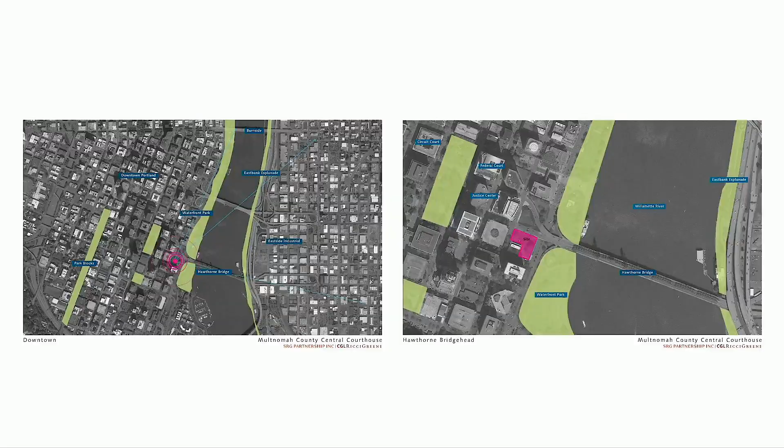Site selection was one of the very first pieces of the project. We wanted to find a site that improved access to the building, that was in the downtown corridor, convenient to public transportation hubs, and a prominent location that people could find. That was one of the really critical pieces.

There were a lot of considerations in terms of access for law enforcement and access to the jails. Some stakeholders wanted a courthouse located more conveniently to other jails in the county, further east. Keeping it in the corridor helped the people most in need of the courthouse have really direct access.

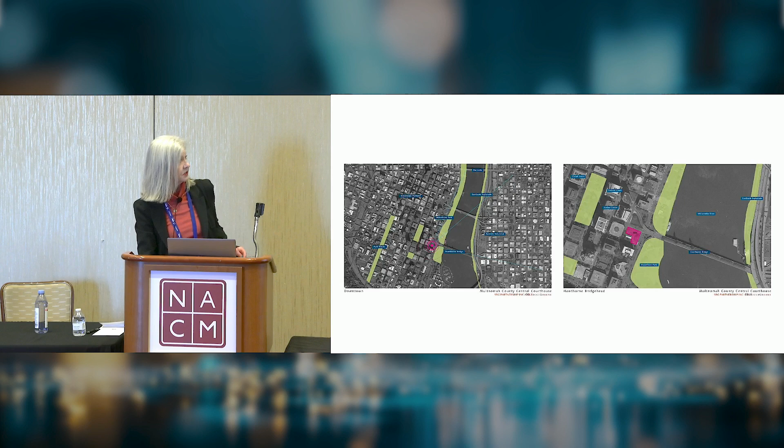This is the location. You can see the red area showing where we were located. The courthouse is located directly on the Willamette River.

These are just some beauty shots showing the views as you're looking east from our courthouse. We are fortunate to have a view of Mount Hood from that aspect.

This shows the footprint of our courthouse. The entrance is at the northwest corner, so the court faces east to the river. That's the river side, and the westerly facing side is where you enter the courthouse.

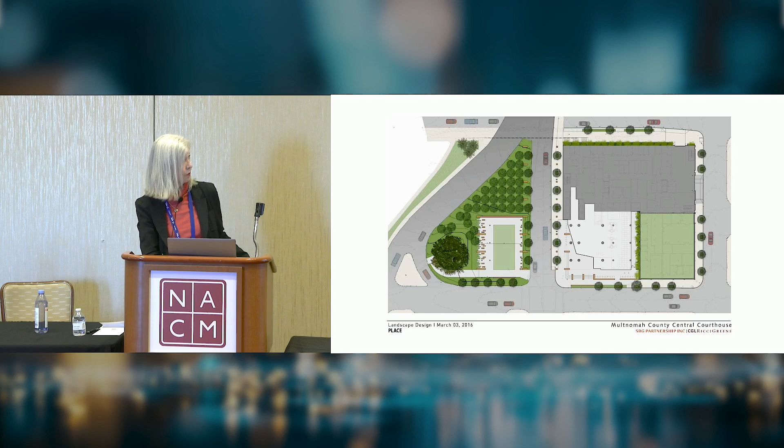The court entry is a 3-story glass corner, so all sides are glass, and it really does physically embody transparency. As you're entering the courthouse, you know what you're going into. Compare that to those solid wooden doors in a big marble building we had before - here, as you're crossing the street and entering the steps, you can get a glimpse of what's going on inside, where you're going to be going once you get in there.

An aspect that was really important to the city of Portland was pedestrian improvement.

This is the first floor of the courthouse and the sidewalks surrounding it. The city's initial goal, in order to improve the pedestrian experience, was to offer retail on the first floor and have windows looking into the courthouse from the sidewalks.

That was a real concern for those of us working on the design, because the first floor needed to accommodate detention space for people coming in custody. Obviously, windows looking into detention holding areas is not an ideal thing.

And when you think about retail on the first floor of a courthouse with all the courtrooms above it, with no security in a retail area, somebody could leave a backpack or anything explosive, really putting the entire courthouse at risk. So we wanted the entire courthouse perimeter secure.

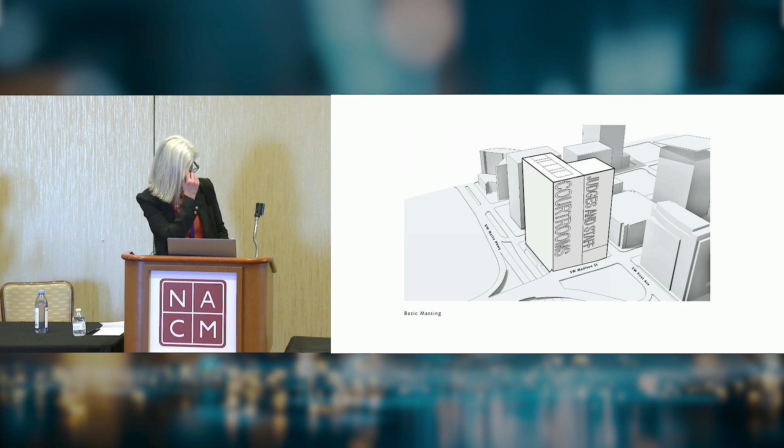Actually, this is probably a good time to turn it over to you for a bit to talk about the makeup of the building. Oops, now I'm going to go back one. I think this is all my fault, by the way, as usual - that's what I'm here for. No, the slideshow was originally set up to automatically advance. I thought I had turned that feature off. Clearly I did not, and poor Barb had to suffer the consequences.

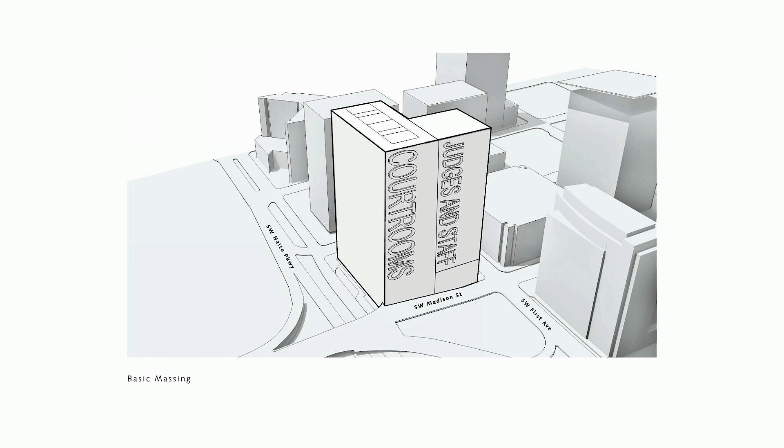I was so inspired by Judge Pratt's presentation this morning. She took what we thought we were going to talk about and made it spectacular - expanded and personalized it in tremendous ways. But I was struck that everything she was doing, all that wonderful work, was taking place in that old courthouse. It was all make-do, work-around, and the effectiveness and positive outcomes of those interactions were very much related to human interaction - the way you speak to someone, the way you show them that you care and show respect, et cetera.

So what we were doing here is kind of the flip side of that. We were taking all those principles, as espoused by Judge Waller and by Barb, and asking: how do you make a building out of that? How do you make a building that expresses procedural justice? That's a little bit what I'm going to talk about today.

You can see, for instance, this is the building on its site. It fills up the entire site.

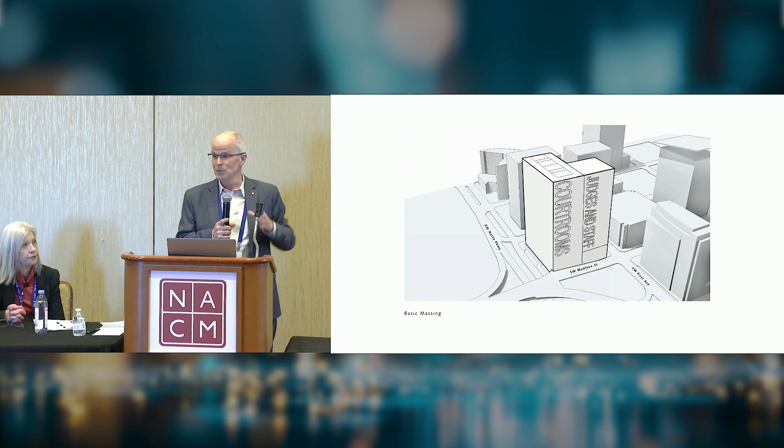Portland, Oregon is 200 by 200 foot square blocks for the whole downtown, which for a courthouse with 45 courtrooms is tiny, so it's jammed in there. It's 17 stories high, with absolutely no setback from the property line. There's no courthouse square, no public space in front of the courthouse, which is so fundamental, you just expect it.

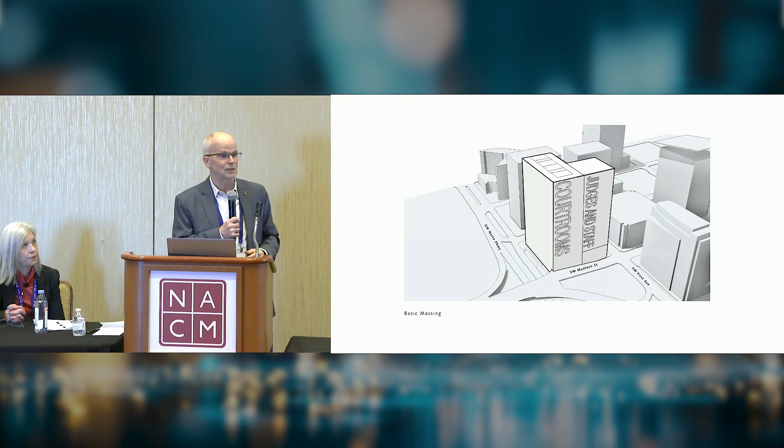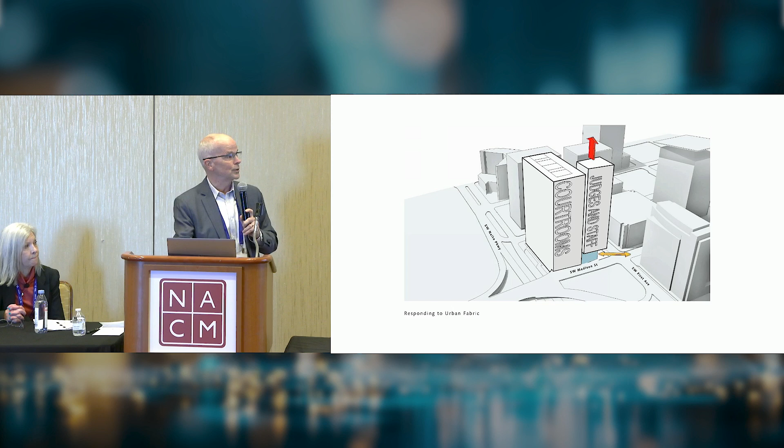So we actually put the public space, the courthouse square, underneath the courthouse. We organized the building into two big blocks, courtrooms and judges and staff, and lifted the building up so the public could have a large public space, with transparency and civic grandeur inside the building rather than in front of it like the old building had. We lifted up the block of judges and staff, and oriented the courtrooms and public spaces to the view. Mount Hood is really spectacular.

Snow-capped most of the summer, but certainly right now. Then we created a public experience coming through the lobby that brings you to that view, to the Willamette River in the foreground, the city, the park in front, and then the view. So the idea that you have a courthouse that... I'm sorry, I saw a hand go up.

Well, believe it or not, every now and then you get a clear day in Portland.

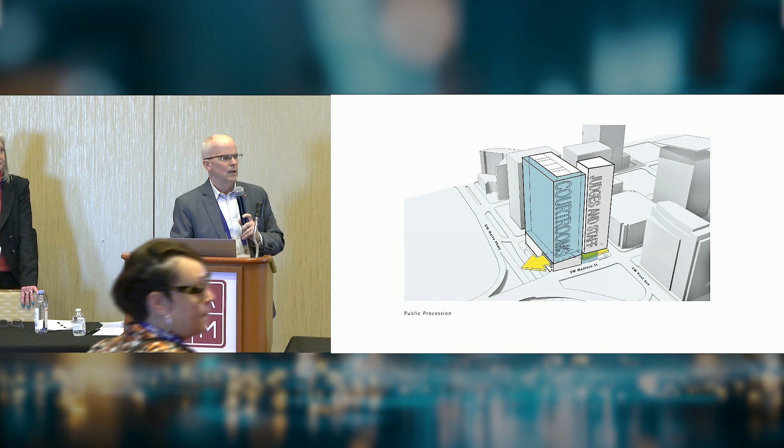Well, the windows in the front, you mean the public entrance? You'll see in a minute how we manage the security screening, but they're not bullet resistant. They're very, very large windows that are laminated glass. They're abuse resistant, but if you're going to try to create ballistic glass on a 35-foot tall piece of glass, it's just not economic.

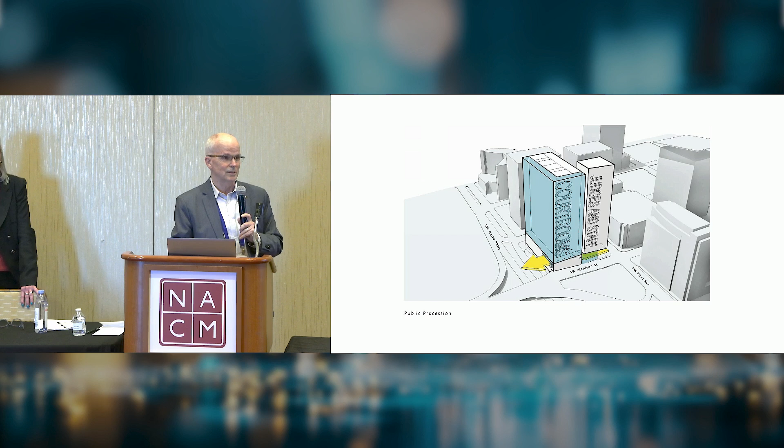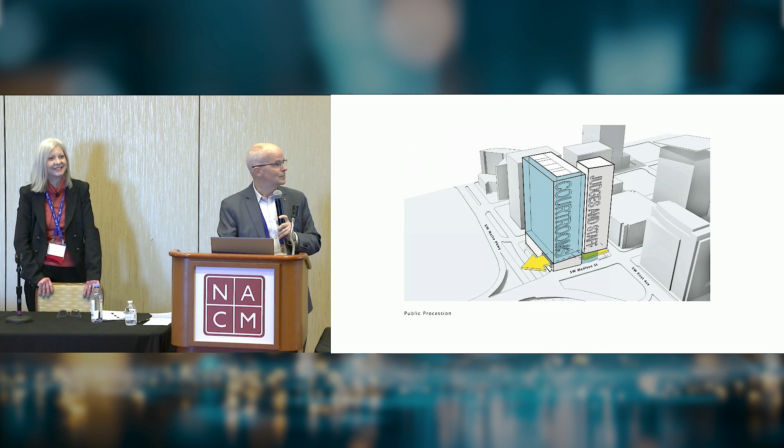Because of the expense, it was cost prohibitive to have bulletproof glass. They are damage resistant and were tested for projectiles. We did have one break, so we discovered they can be broken, and that's a challenge, but only one, and we did get it replaced, and since then we haven't had any more difficulty with them.

The idea was very much to present the building as open and welcoming and public, so immediately the procedural justice message is one that's communicated even upon approaching the building.

Another piece of it—we did a very extensive study of the security screening process, because this entrance was going to be for everyone: judges, staff, and public. We had to run all those streams through, but again, treating people respectfully starts right at the front door, and how they're treated while queuing to go through screening, not wasting their time. They can see where they're going, have adequate queuing inside the building instead of down the sidewalk in the Portland rain, plus a separate stream for frequent flyers.

Sir? That's correct. What you can see in the slide here are, through the different colors, the blue route where our judges and staff enter, and there is a glass divider between where the judges and staff enter and where the public enter, but it's essentially following the same path.

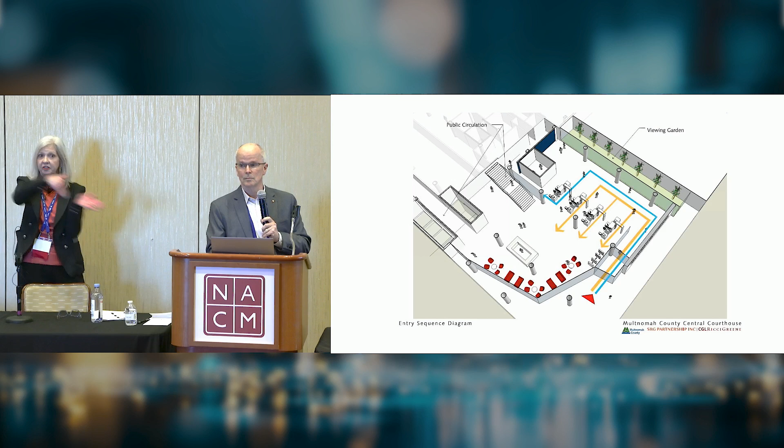The judges are parking in a parking garage across the street, so there's no parking garage just for the judges underneath the building. There's really no basement in this building because of the subsurface conditions.

Especially hearing about court security, I'm surprised the security people and the judges didn't object to that, because you usually hear the opposite from security people—they want to separate that out. They understood there was only X dollars for the project and it just didn't fit, and they got it. They were very much involved, and so desperate to get this building that they were willing to make some compromises, but they were very much team players. You're right though, it's unusual in a courthouse.

We'll talk a little further in the presentation about the separation of the circulation systems in the building. Contrary to the historic courthouse we were in before, this building has private security, private areas for staff and judges, secure areas for people in custody, and then public areas.

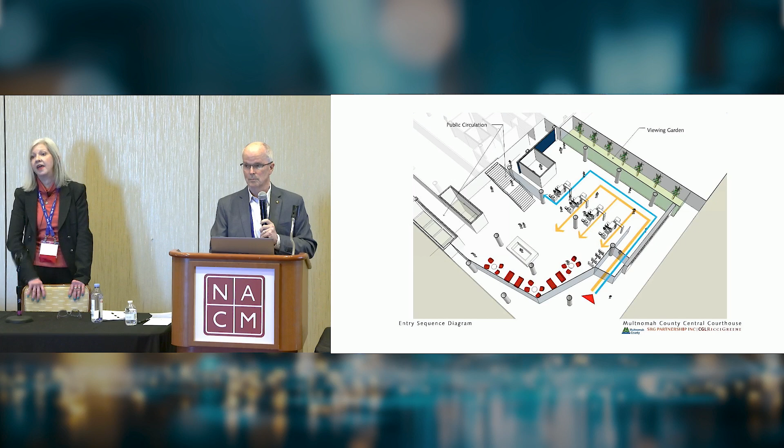So those paths don't necessarily cross in the building, but there is just one main entrance. What you'll see, that green area to the right is a garden immediately outside the security screening area. That's actually where the judges enter. They come through the garden and around the back, so they're not in the building mixing with the people in this secure line.

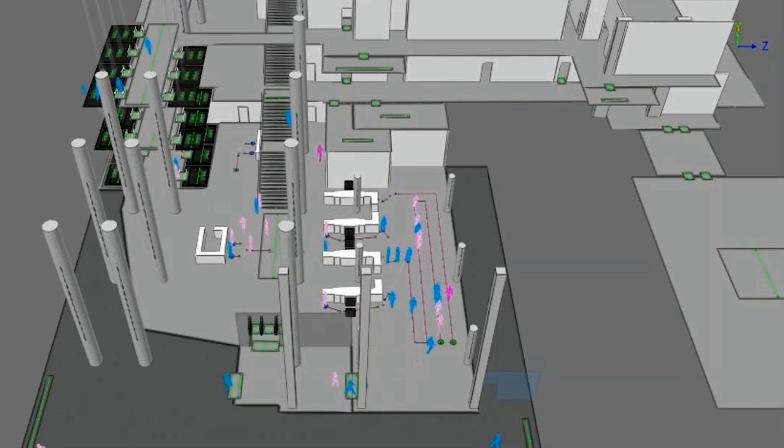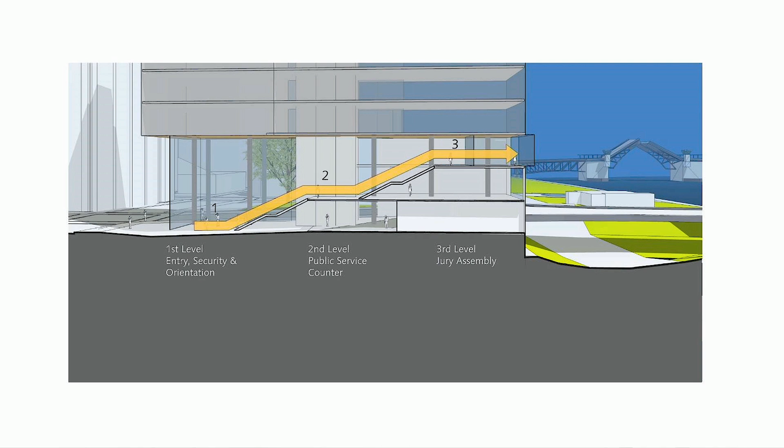We did a number of animations that show how all of that works. But really the big move here, the big procedural justice piece, is for the public - when they enter the building and go to their destination, all the clerk counters, the high volume courts, jury assembly, even the coffee shop, happens along this one route. It's a big giant space with very welcoming stairways and elevators, with a drop dead view at the end of it.

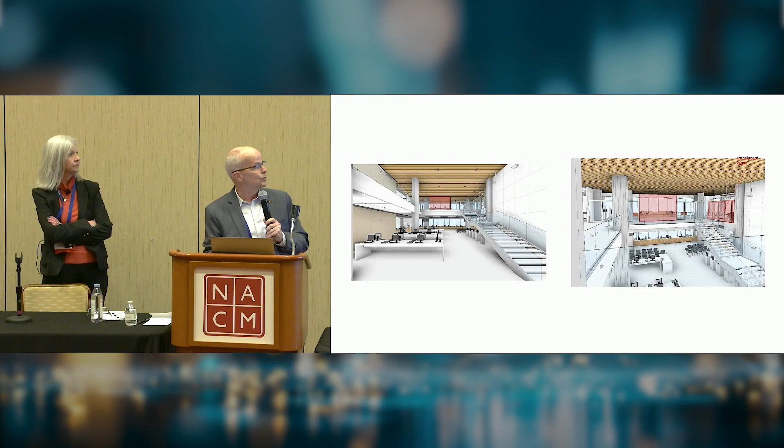So it's all set up for the public to say wow every time they come to the building. This is what people see after they've passed through security. There's an information desk, a whole series of monitors, and then there's the stair that tells you where you would go next, because there's nothing else on this floor. If you're going to a courtroom for a trial, you get on the elevators because it's a tall building. But if you're there to transact, it's very much like a shopping mall experience - it's all right there in front of you, and you can go left, you can go right, you can go up.

Can you pause for a second here?

In the slide snafu, I didn't get an opportunity to tell you - one of the initial things we did, simultaneous with our site selection, was have the Center for Court Innovation come in and do a site assessment for us. They really identified issues in our historic courthouse as well as our other court facilities, this being one of our 5 courthouses. Looking at how we were doing business, they observed court proceedings, our customer service counters, looked at our signage, talked to our staff and judges, and then provided us with a report.

That report identified the things that were ripe for improvement, things that were not meeting our standards for how we were delivering service. Many of those things were things we already knew, but hadn't really been able to work on until we had this opportunity to design a new building.

What you're seeing right here, the first 3 floors of the building were intentionally designed to incorporate the aspects of service that happen most frequently. So the highest demand things that people are in the courthouse for are on the lowest floors of the building, primarily to make it easier for them to navigate. We have our customer service areas in a centralized location as opposed to randomly located around the building. We have jury services on the 3rd floor, and a central staircase that goes up the first 3 floors, making it really easy for people to see where they're going in those really busy, high-volume areas.

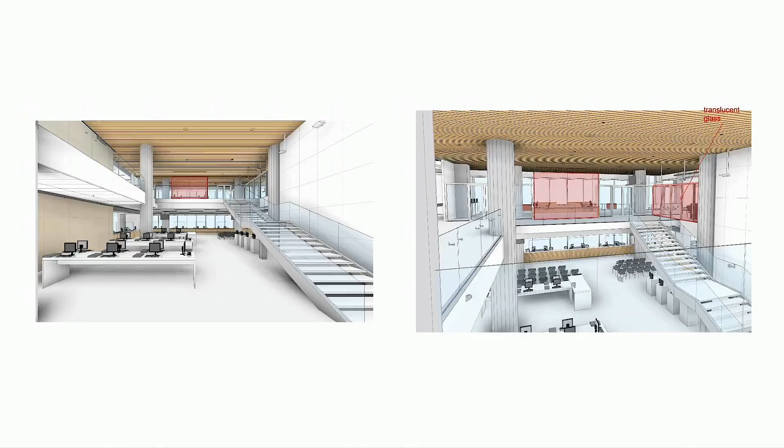One really challenging factor - halfway through design, the county's project manager said, 'Oh good news, remember that historic building on the corner we weren't sure if we could get? Well, we got it. So we're going to change the project to include 4 high-volume courts that were in the municipal courts. We're going to bring those to this project, and you get to design those as well.' I was like, 'Oh good, it means we can start again,' just for the base. So it was really cool.

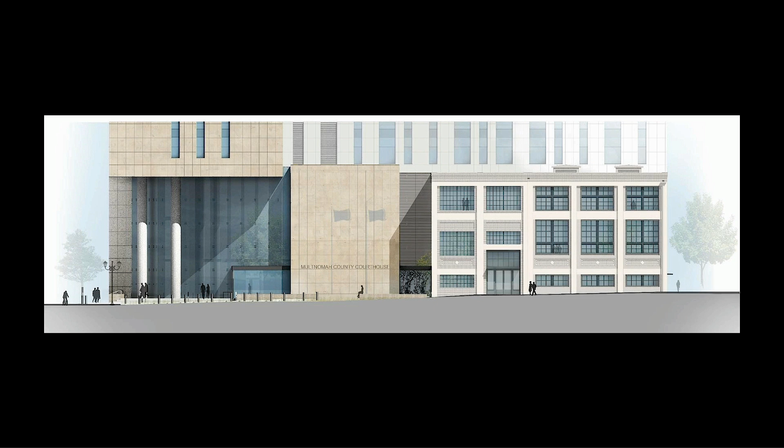So traffic, landlord-tenant, small claims, and traffic arraignment are all located in this really cool National Historic Register building that had formerly been the transformer station for the streetcars in Portland.

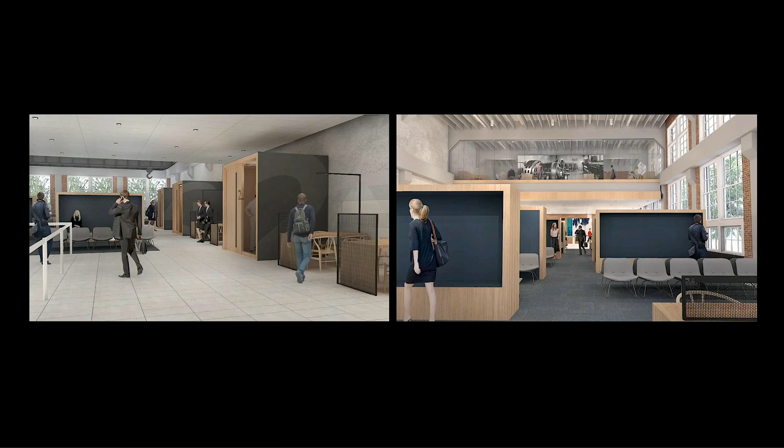So it's an industrial space, and you can see in the back of the photo on the right a large crane with a hook on it. It was the only piece of the original building interiors that was left. So there was some debate about whether, when installing courtrooms like this, a crane would have a place in a courthouse. You can see the hook in the background of the image on the right. It wasn't a threat or an implied outcome, but it was just a nice piece of historic fabric to keep, and a little bit of a chuckle.

But let me explain a little more about what's going on in this space that we fondly call the crane room. Because these are our high volume areas, there are a lot of people who have to negotiate. For small claims, parties need to determine if they can reach a resolution. For traffic and parking citations, often an officer has advised the defendant that if they take a class, they would be willing to dismiss or reduce the charges. So negotiation has to happen.

In our historic courthouse, that all happened within the courtroom. All the parties arrived, tried to find their opposing party, and tried to have those conversations in the same room that everybody else was having those conversations in, while the judge was getting ready to start proceedings. Not ideal by any stretch. When you're trying to de-escalate tensions and help people calm down so they can address their court matters, making a really chaotic environment for them to wait in is not ideal.

So what we did here is create a space that has some semblance of privacy, with a lot of different little areas, alcoves, tables, and clusters of seating, so people have areas where they can get out of the courtroom and have those important conversations. The courtrooms themselves are smaller; they're not meant to hold everybody appearing for the entire morning, just 8 to 10 parties. So people can have those conversations outside the courtroom and come in once they're ready to address the judge.

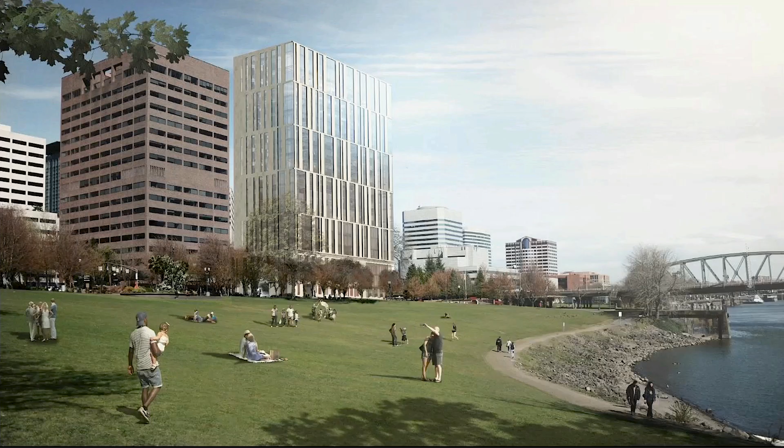Go ahead, I think we have a question over here.

So I see that your setting is normal. Do you plan on going virtual for those who can't come in person?

A lot of what you're seeing was the design of the courthouse, which was pre-pandemic, so we hadn't incorporated remote hearings as a normal way of proceeding. It was really just a few witnesses appearing remotely, only for special circumstances. Of course, that all changed during the pandemic, and we opened this building in 2020. So we immediately started utilizing our spaces and our technology in different ways than we'd envisioned.

I was explaining to Frank some of the spaces we had planned that we've never used for the designs intended so far. We've been operating this building for five years now but have yet to use them in the way they were originally planned or envisioned. But we really did a good job, and the architects did an amazing job helping us future-proof the building by making it flexible with the technology we had.